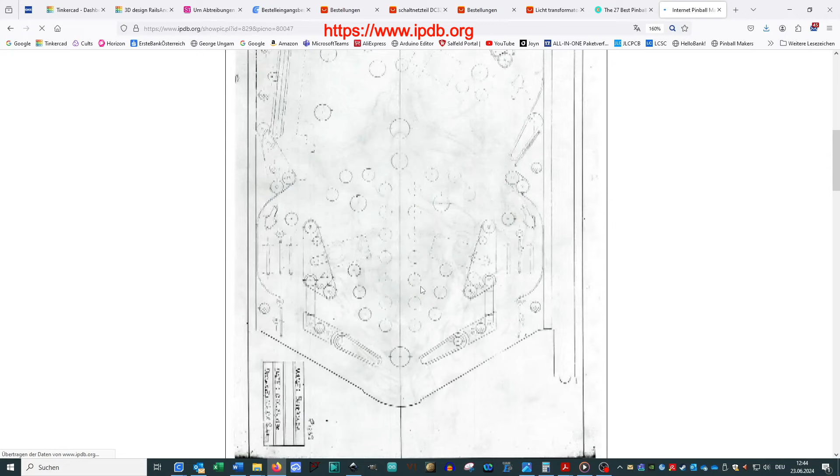I started looking for documents about the machine and I ended up on the Internet Pinball Database site. I was extremely lucky that a playfield plan for the Fathom is available there. This makes the reconstruction much easier and ensures that the proportions will be correct when scaled down to a playfield size of 50 by 100 centimeters.

For this project I took a different approach. Instead of using a blueprint to transfer the dimensions to the playfield and milling all the holes manually using templates, as shown here, I built a mostly printed CNC machine and milled the playing field automatically. As it turned out, this wasn't as beneficial as I thought.

Regardless of whether it is milled by hand or automatically, the plan must be adjusted to the correct size. The playing field will be 500 by 1000 millimeters. I use the vector graphics program named Inkscape for this. I create a frame exactly as big as the playfield will be and place it directly above the document. This helps to position the downloaded blueprint better.

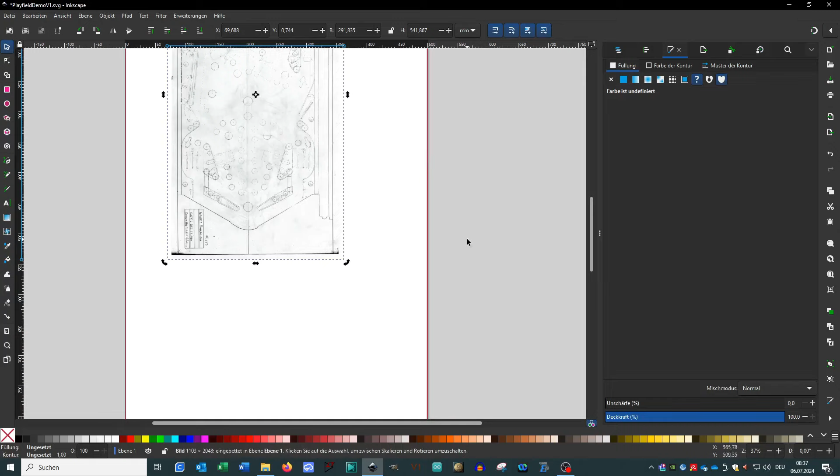Now the previously downloaded blueprint is imported and roughly adjusted to the required size. As it turned out, the blueprint was a bit distorted and also a bit twisted. The plan had to be aligned with the frame.

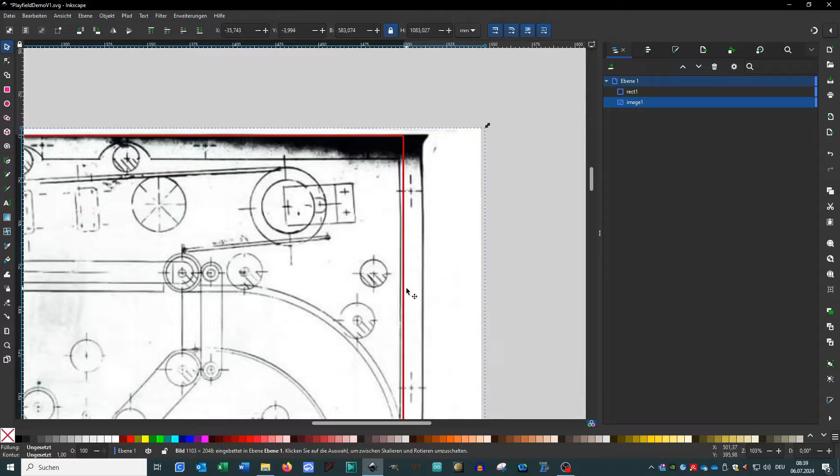In order to align the construction plan correctly, a circular area was inserted which has the dimensions of the ball. With this, the construction plan can be aligned so that the ball exit channel has the correct width. There was a lot of fine-tuning to do, a pretty fiddly job.

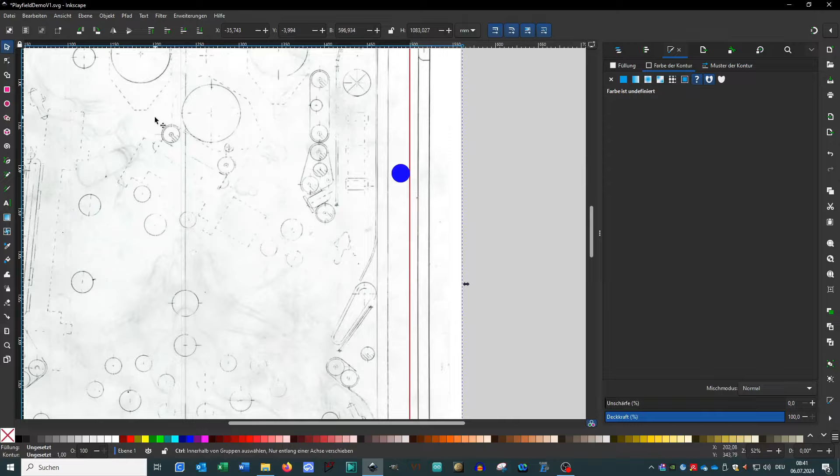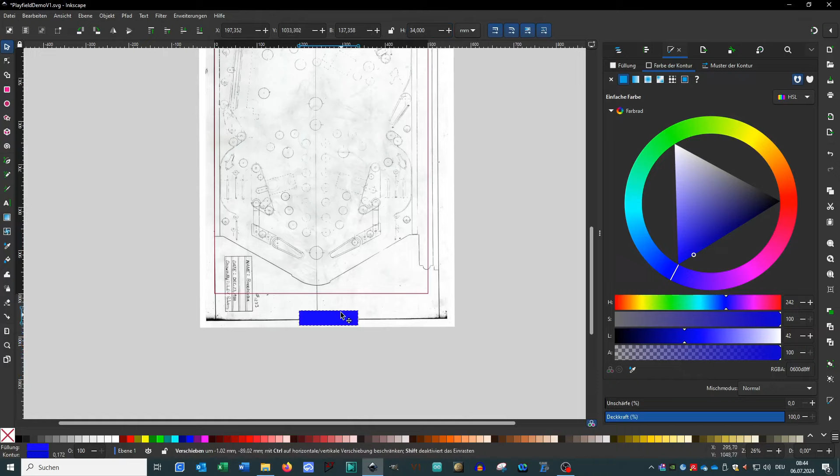Now a rectangle was inserted to adjust the bottom arch distance. I check everything again. Then I remove the circular area and the rectangle. Now I export the document as a PNG graphic. It will now have the exact dimensions required.

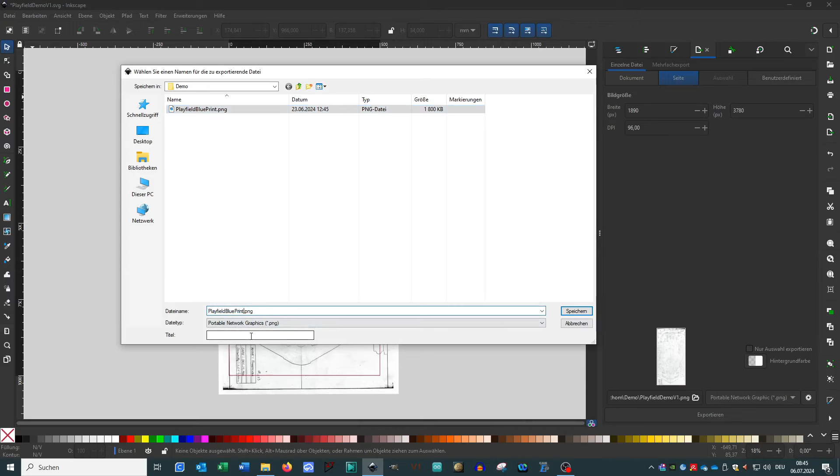I open the exported file to check it. This PNG graphic is needed in the next step. I save the work under a different name, remove the blueprint and import the PNG file I just created and position it exactly above the document.

It is necessary to define at least 3 levels: one for the top and one for the bottom of the playfield and one for the blueprint. The parts which are milled or drilled from above and below must be inserted in the corresponding level. The frame which is already inserted for the blueprint is now copied to the other 2 levels. This is necessary so that the edge of the playing field is visible in the milling program.

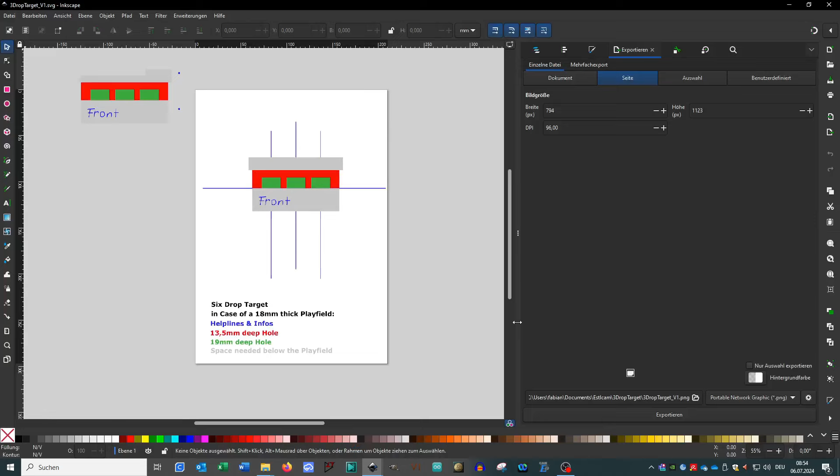I have prepared vector graphics for the individual assembly types. These graphics must now be inserted and aligned individually at the appropriate location. Of course, it must also be inserted on the correct level and, if necessary, moved to the correct one, as here. The transparency of the assembly graphic is increased so that the blueprint can be seen through it. Now the drop target assembly is precisely aligned.

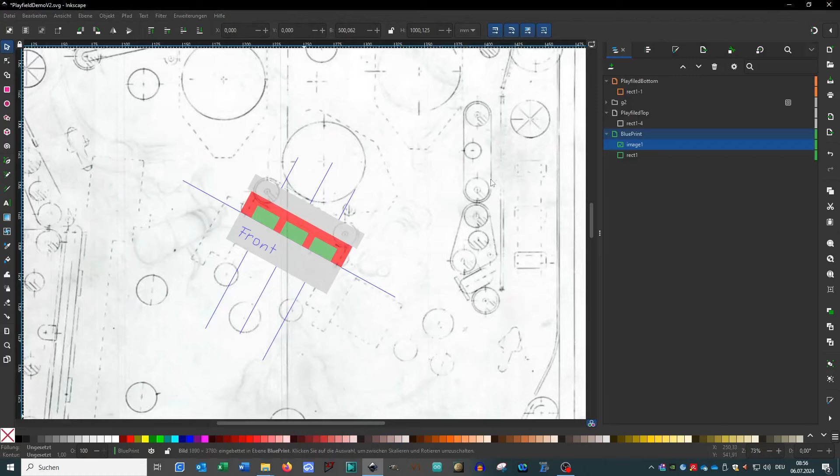This procedure must now be repeated for all assemblies. The inline drop target is inserted here. The gray area defines the space required by the assembly under the playfield, the green holes and red blind holes. The blue lines are for alignment.

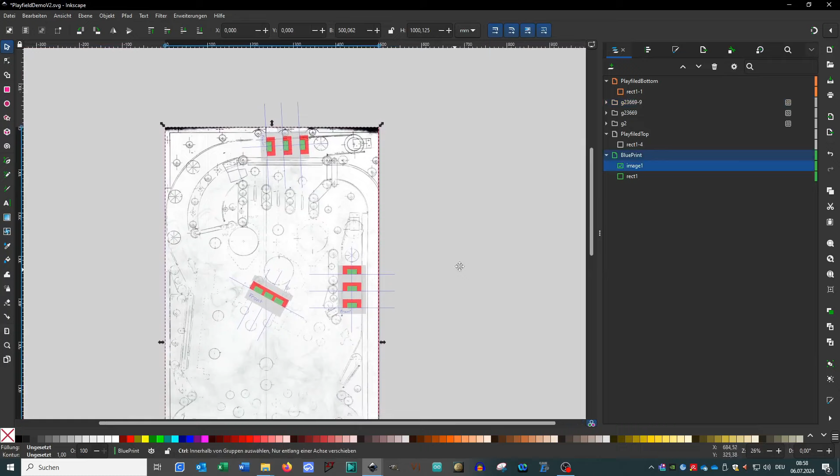Now the 6-drop target vector graphic is inserted. The procedure is the same as for the drop targets before.

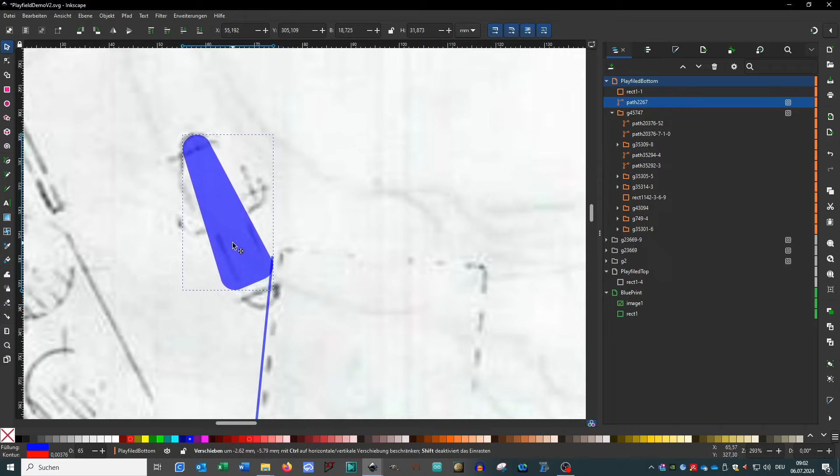I'll now continue with the arrows. I left them in the design of the Space Shuttle pinball machine because I like this design better than the Fathoms. These are copied and inserted and aligned at the appropriate places. Now the bumper vector graphics are inserted and aligned. All assemblies graphics must now be moved to the correct level.

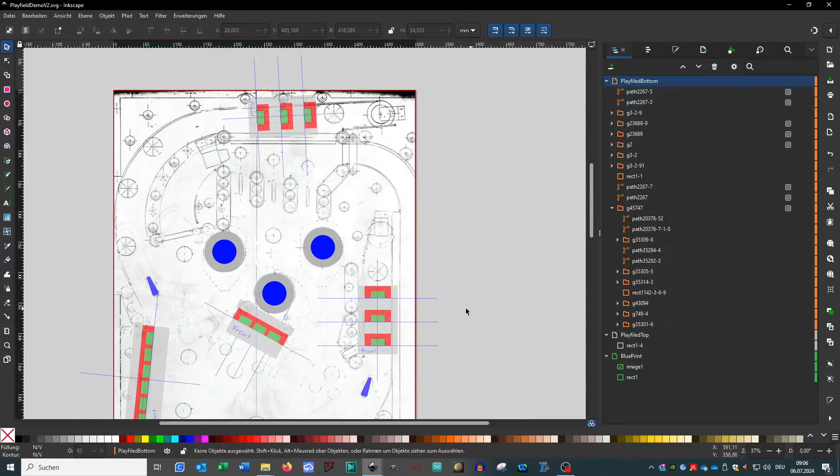Now the graphics for the flipper axis position are inserted. Unfortunately, the blueprint is distorted, so I have to determine the position intuitively. The flipper distance of 178 mm results from the scaling.

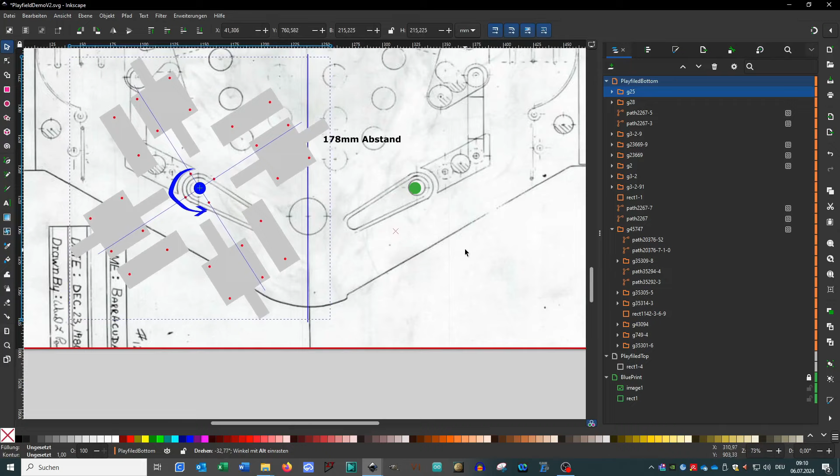The vector graphics for the flipper assembly are inserted. 2 solenoids and a leaf spring switch are required per flipper. The graphic contains all 4 possible positions for these. The blue arrows correspond to the direction of rotation of the flipper.

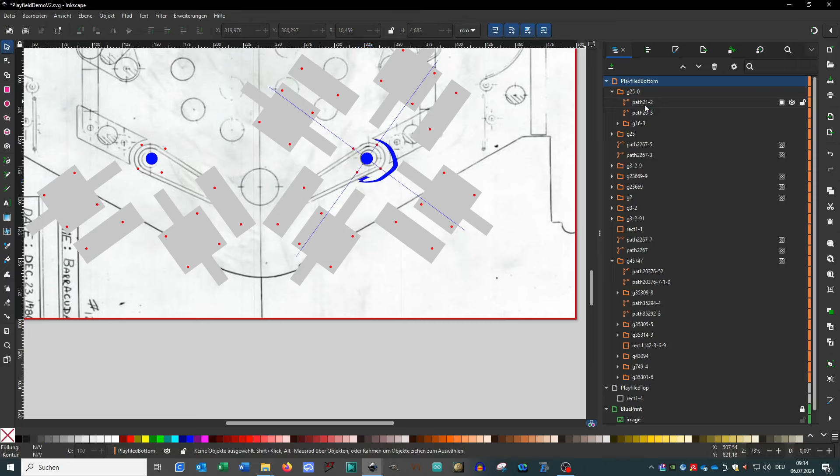The graphics must be aligned so that 2 solenoids and a leaf spring switch do not overlap with other assemblies, lamps or sensors. The parts of the graphics that are not required must be removed. The red dots correspond to the holes needed to attach the pinball assemblies to the playfield.

The third flipper is now inserted. Since there is not enough space for a 90 degrees arrangement of the solenoids, they are arranged one behind the other. As before, any graphic parts that are not required must be deleted.

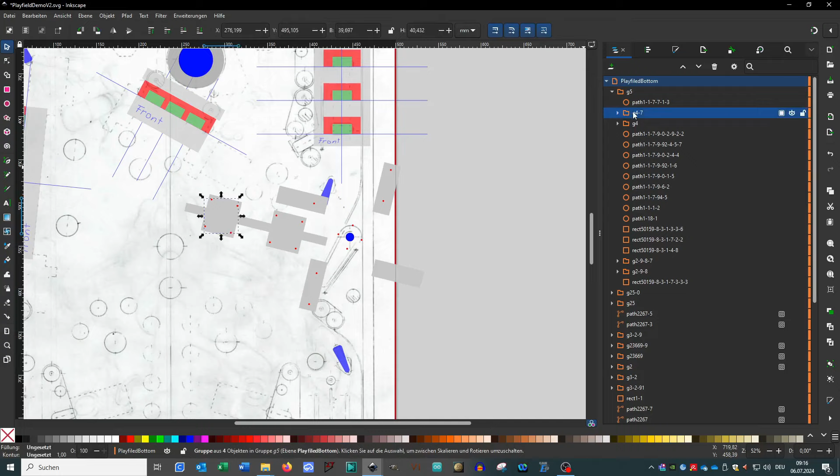I copy the kickout assembly graphic. This is inserted and aligned in the appropriate places. The red area represents the space required under the playfield, the blue the required hole. Here too I remove the unnecessary graphic components.

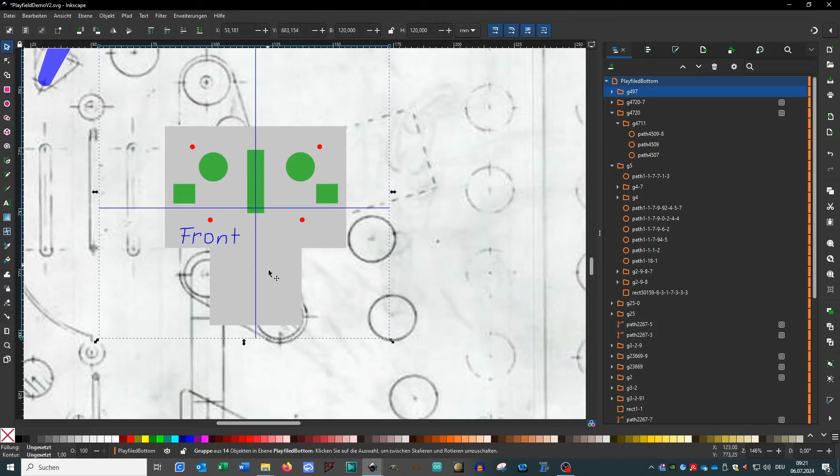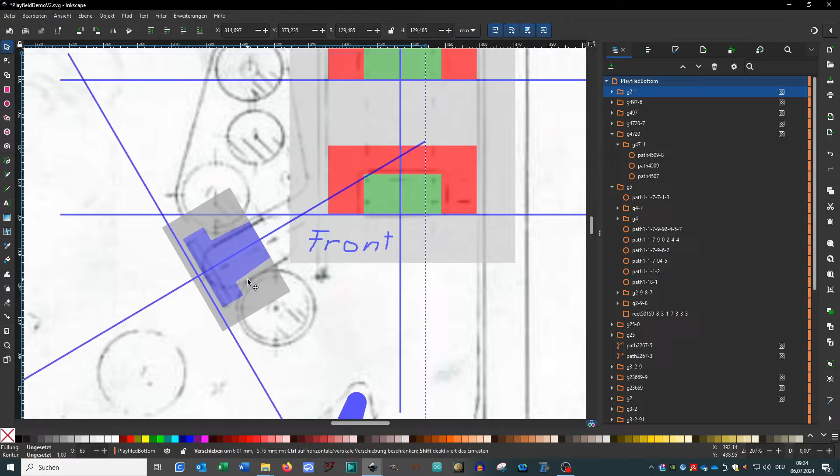As with the assemblies before, I proceed with the slingshot in the same way. And now I do the same thing with the stand-up target. Since I did not delete the unnecessary graphic parts in some assemblies at the beginning, I am now doing this.

Now the lane guides are inserted and the usual procedure is followed. The red dots correspond to the required holes.

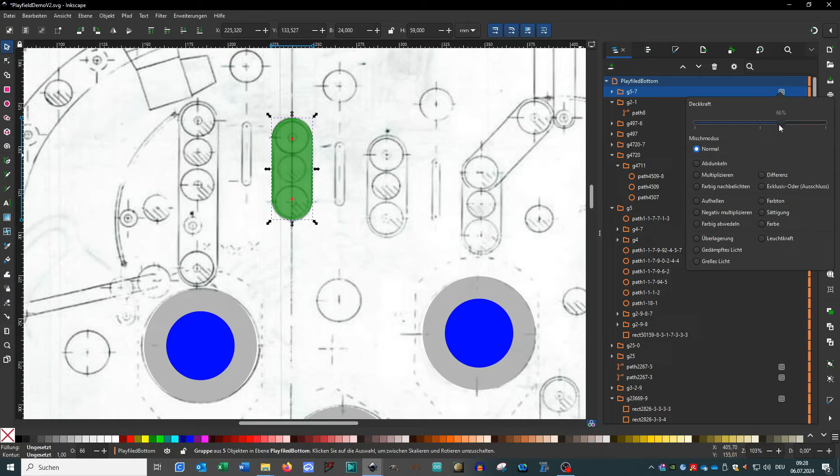Now the holes for the lamps are inserted. The blue area corresponds to the hole and the cyan area to a blind hole. The blind hole is needed because the bulb socket thickens towards the bottom. In some places the holes for the lamps have to be aligned so that they do not overlap with other holes.

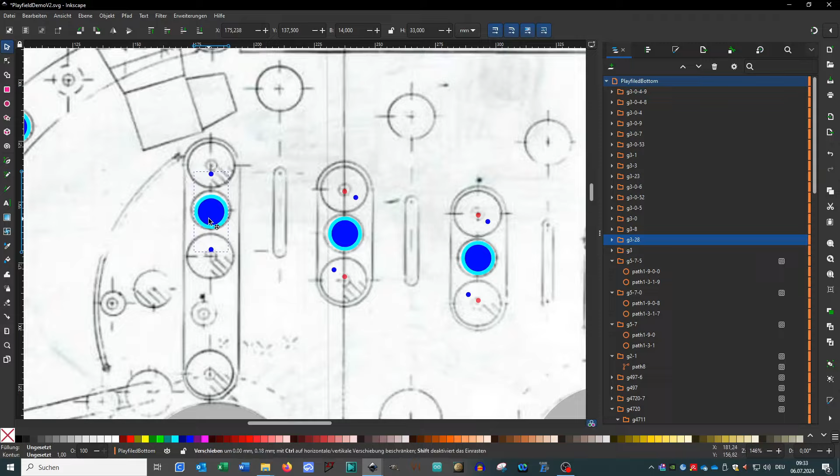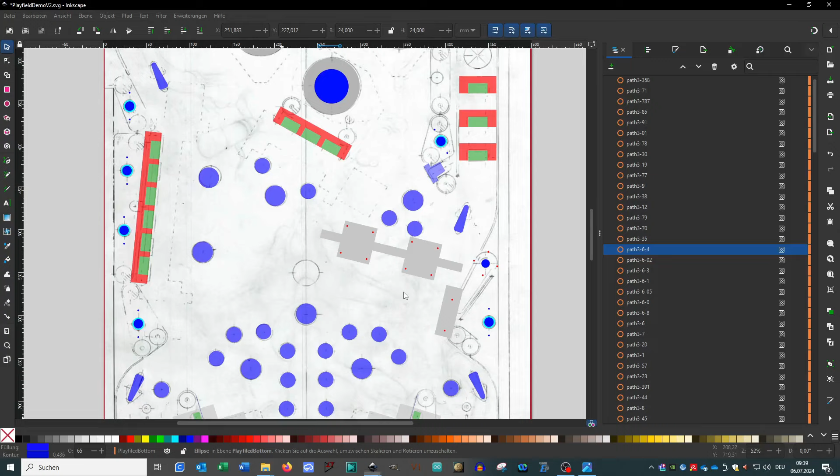I create a circular area for the lamps and sensors and copy and paste it in all the necessary places. I also change the size of the circular area accordingly. Here I notice that the blueprint differs from the real Fathom playfield. I check this using pictures that I downloaded from the internet beforehand. I insert these lamps according to the pictures.

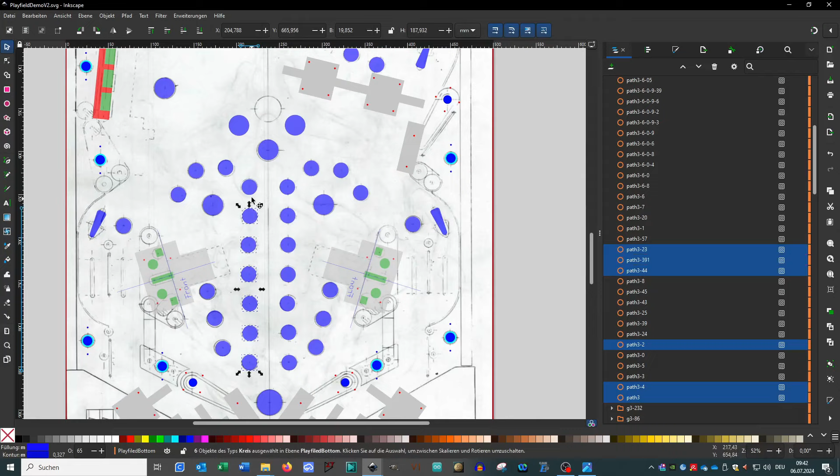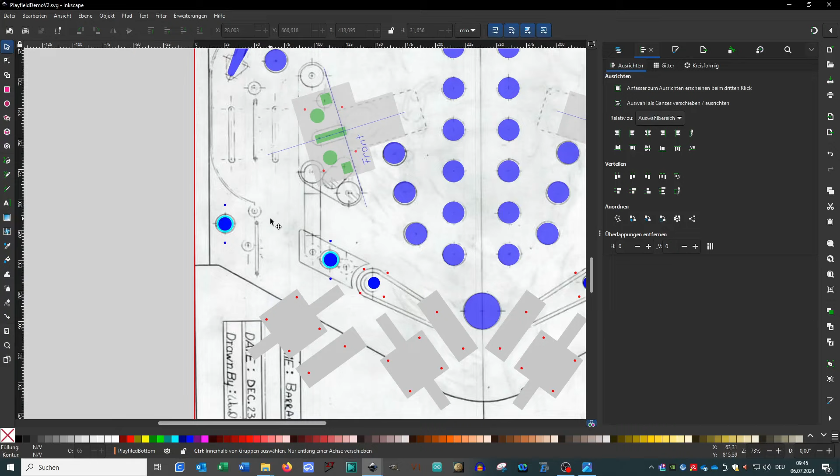After all the lamps and sensors have been inserted, I align them horizontally and vertically if necessary using a graphic program's tool. Now I continue with the playfield posts. As before, the graphics are inserted, configured to be transparent and inserted and adjusted in all necessary places.

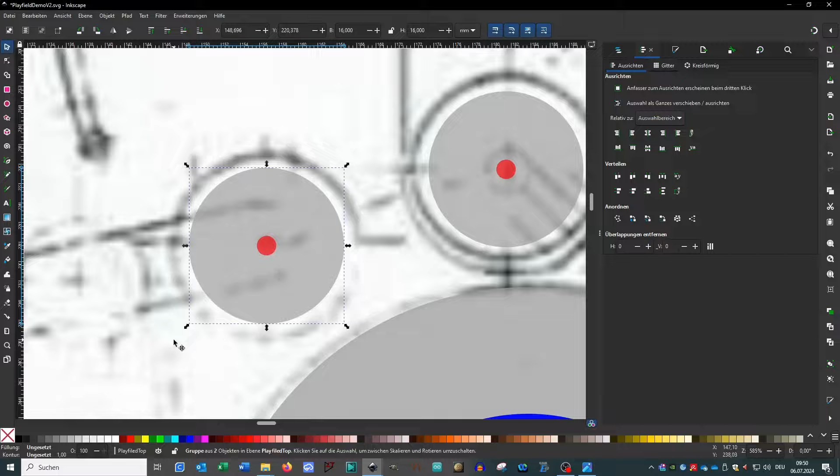I forgot 4 holes for the lane sensors before, which I am now adding. To be on the safe side, I check whether others are missing.

I'll continue with the rail posts. The red dot on the posts corresponds to the hole required. The posts must be inserted at the level that corresponds to the top of the playfield. The rail posts will later hold the rail that defines the lane path.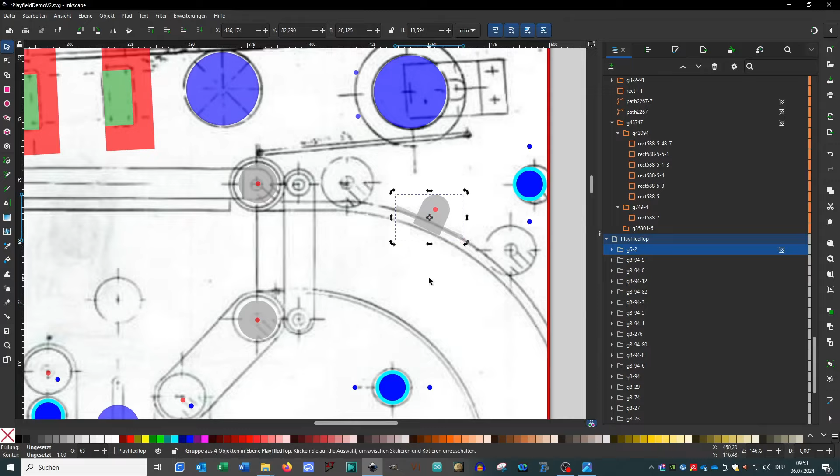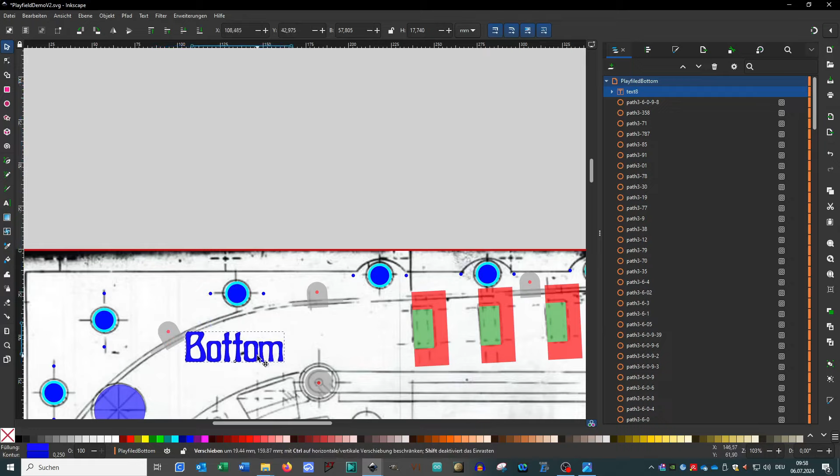The top and bottom sides are milled and drilled one after the other. Therefore, I add labels that define the level in the graphics program. The bottom of the playfield has to be mirrored, so I also mirror the label.

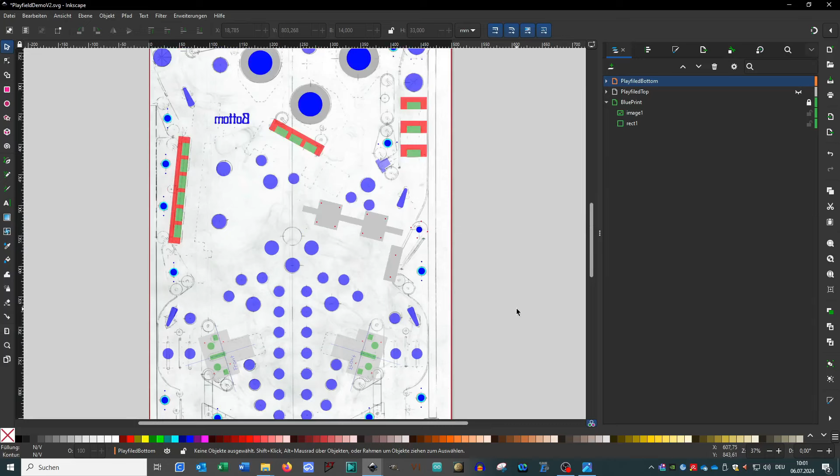Now I check whether all assemblies, drillings and holes are inserted on the correct level. This is very easy to do by fading the individual levels in and out. With the slingshots I also remove unnecessary graphic parts that are not needed for milling and drilling. To keep the video shorter, from here on only the bottom side is shown.

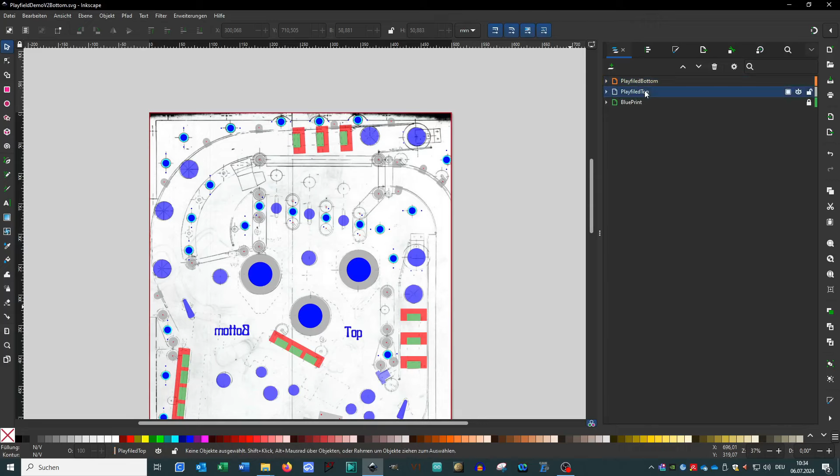Since all assemblies, holes and drill holes have been successfully created, the graphics, top and bottom, must be separated from each other in order to be able to import them individually into the CNC program. Therefore, I save them under an appropriate name. The entire graphic for the bottom side must be mirrored, rotated 90 degrees and saved as a DXF file so that it is displayed correctly in my CNC program.

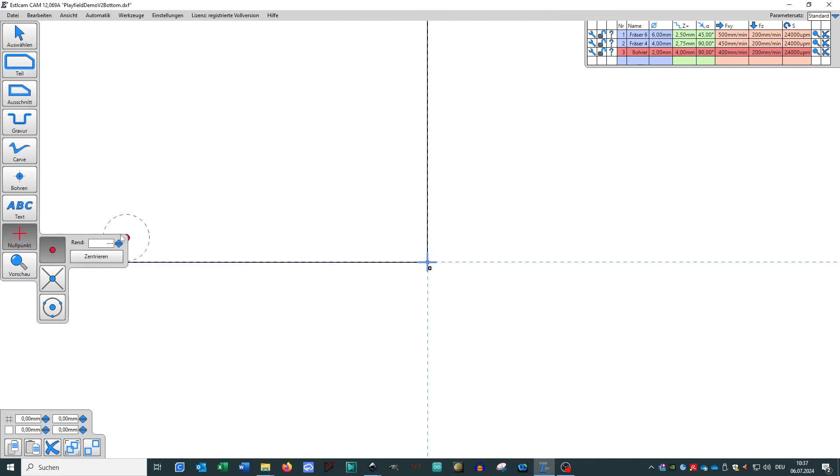I use Estlcam as a CNC machining program. I open the previously saved file with it. Here I set the 0 point. I start to configure the drill holes. I defined a 2 mm drill in the CNC program, activated it and selected drilling. Now all the holes have to be configured.

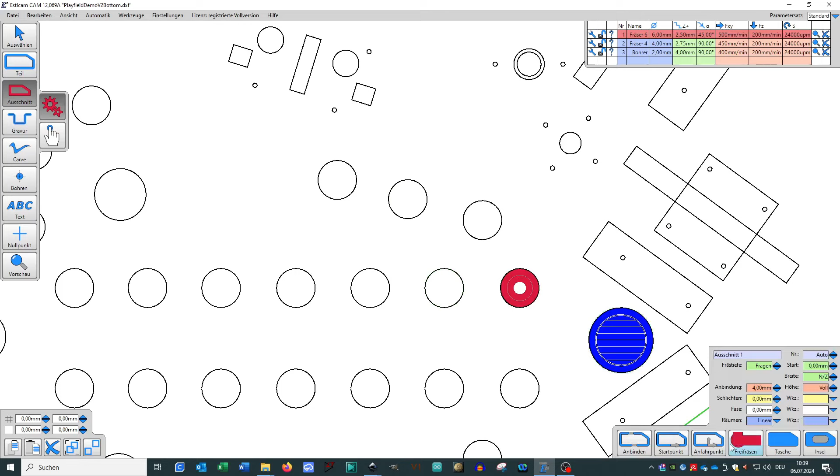After the drilling holes, I will configure the holes for the lamps, sensors, bumper and kick-out hole. To do this, I switch to a 6 mm milling head. I now select the cutout function in the CNC program and use it to mark a group of lamps. I select these and define the milling depth as 19 mm, since my playfield is 18 mm thick. I also configure the complete cutout function.

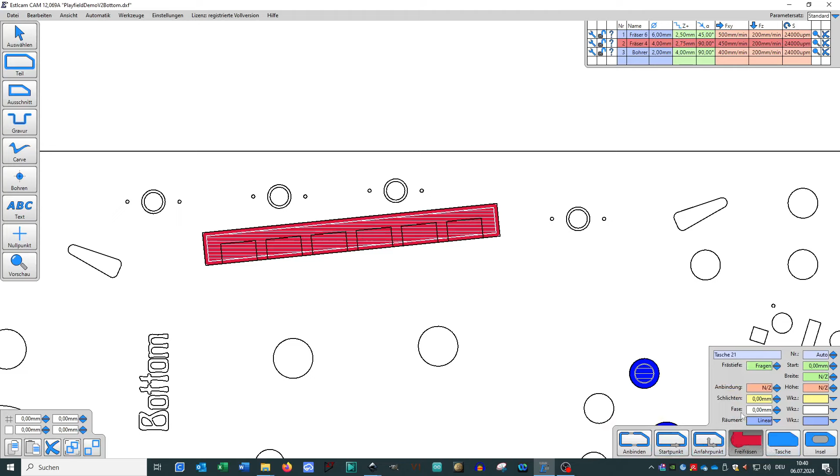Here I switched to a 4 mm milling head to configure the drop targets. I start with the blind hole, which should be 13.5 mm deep. Then I configure the holes for the individual drop targets, which should again be milled 19 mm deep.

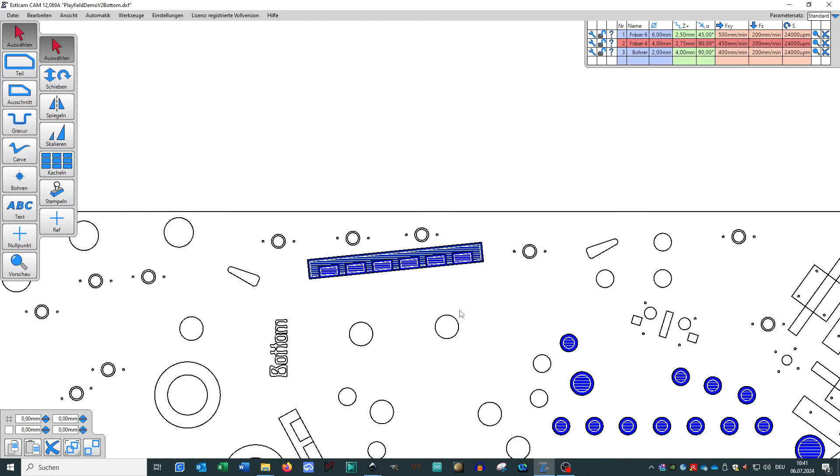Now I configure the holes for the lamp sockets. To do this, I switch back to the 6 mm milling head. First I configure the entire hole, then the blind hole with a depth of 7 mm. Here is the end result after all drilling and milling operations have been configured and some cleanups have been carried out, such as removing irrelevant rectangles.

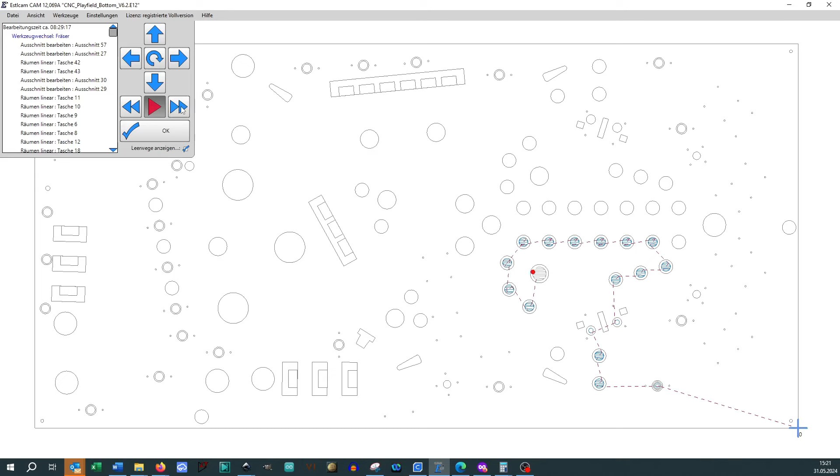I started the CNC machining simulation to check whether all milling operations were carried out correctly. Since the simulation was successful, the next step is to produce the playfield with my CNC milling machine.

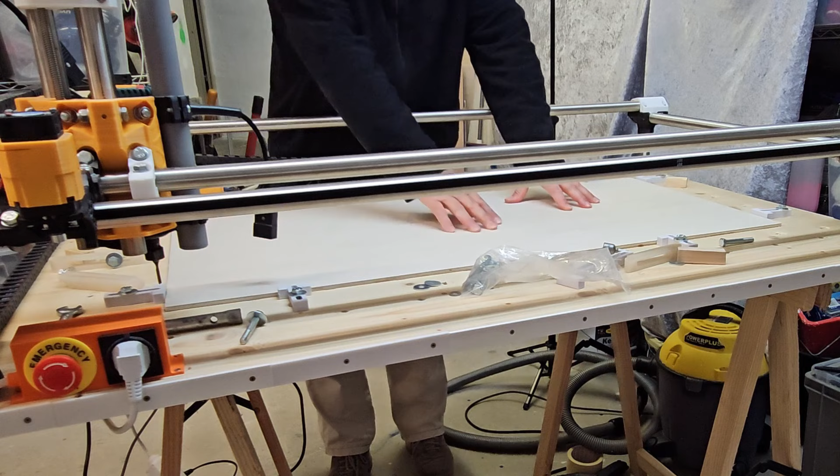First I place the sacrificial plate on the CNC machine, then I take the plywood plate that will be machined and attach it. Then comes the fiddly work of aligning the plates precisely on the machine and setting the 0 point. I fix the plywood panel in the CNC machine. Now I adjust the level of the milling head.

I do this like with a 3D printer with a thicker paper and slowly move the milling cutter down until the paper can no longer be easily pushed back and forth. I zero the X and Y axes by letting them touch the end. Since my CNC machine is very simple, this is the quickest way to do it.

Now I have to make sure that the plywood panel is 100% parallel to the X-axis. To do this, I measure the distance between the panel and the milling head at various points using a sliding gauge. Here I have to move the plywood panel slightly. I loosen the fastening of the plywood panel and tap it into position with a hammer. Then I fasten the plywood panel again.

Finally, I aligned the plywood and adjusted the CNC machine. The next step is milling. Well, it started with a big failure. Although I had already milled a lot with this CNC machine, it failed right from the start. Since the groove that was accidentally milled did not go through the plywood, I decided to continue.

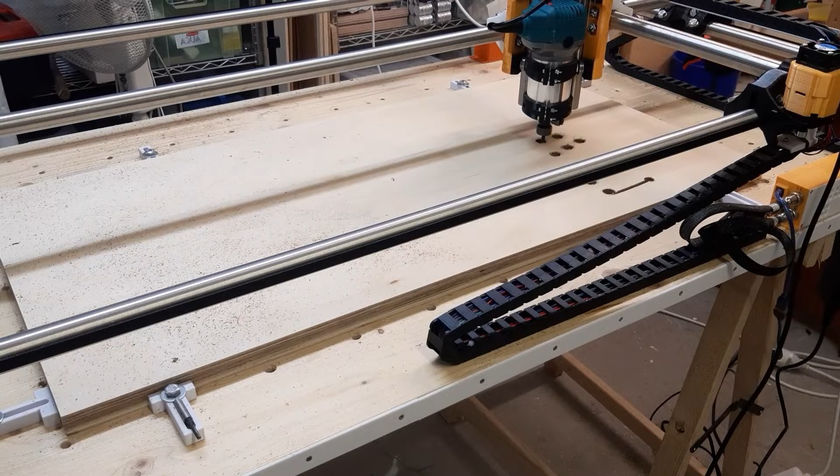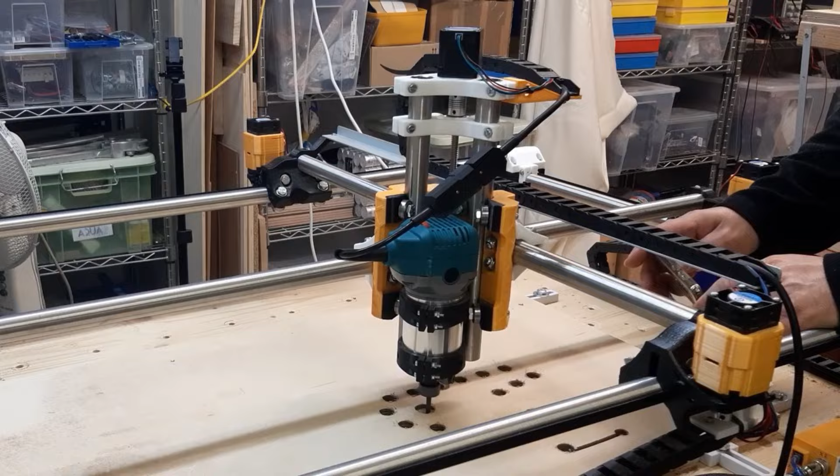Unfortunately, I didn't fix it right away, so it happened again. Nevertheless, I decided to continue with this playfield in order to test the entire milling process. Of course, after each failure I set the 0 points of the CNC machine. I also solved the problem with the milling carriage.

Milling the holes took about 2.5 hours. Because my stepper motors skipped steps, the playfield was anyway unusable. I had an offset of 1.5 mm between the first and last hole. Therefore I didn't mill the holes for the drop targets and drill holes. The result can be seen here. Manually vacuuming the dust was also very tiring. So I had to take care of the CNC milling machine first.

After I fitted the CNC machine with a dust extractor and solved the problem with the stepper motors, I started with a new sheet of plywood. At the beginning everything looked good. This time my cheap milling machine started to have a problem with its rotary wheel, it just stopped. Luckily, I was able to stop the milling program immediately and there was no damage to the playfield or CNC machine.

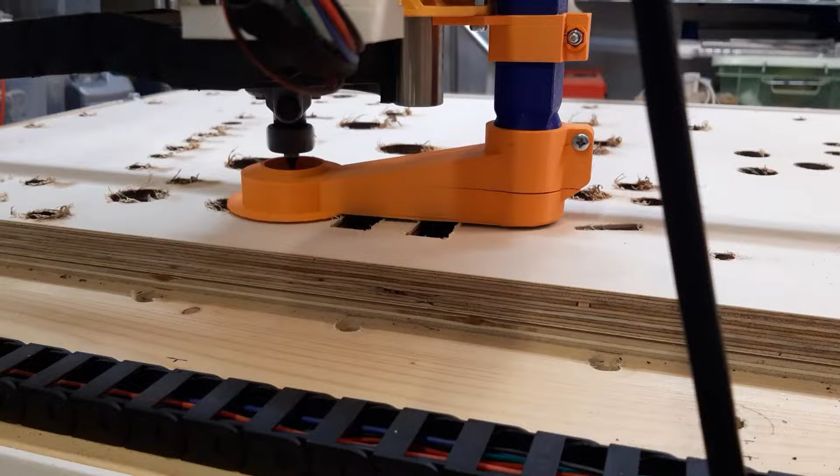The complete milling with the 6mm cutter took 2.5 hours. Unfortunately, the cheap milling machine will cause problems again. Here the last hole is milled with the 6mm cutter. Then I clamped the 4mm cutter into the milling machine and continued milling. After all the holes had been milled with the 4mm milling head, I replaced it with a 1.5mm drill and drilled the required holes.

After all the holes on the bottom of the playfield were drilled, I turned it over and drilled the holes on the top. After everything was milled and drilled, I deburred the holes with sandpaper. Milling this one playfield took almost 2 days. In addition to the long milling and drilling time of around 4 hours, there were many more hours of setting up and fine-tuning the CNC milling machine before each work step. This is the bottom of the playfield, and this is the top. Finally, I can move on to the next step.

Here I mount the playfield on my work frame. This makes it possible to rotate the playfield 360 degrees and makes working much easier. The work frame can also be set to a gradient of around 7 degrees. This makes it possible to play pinball test games during the construction phase.

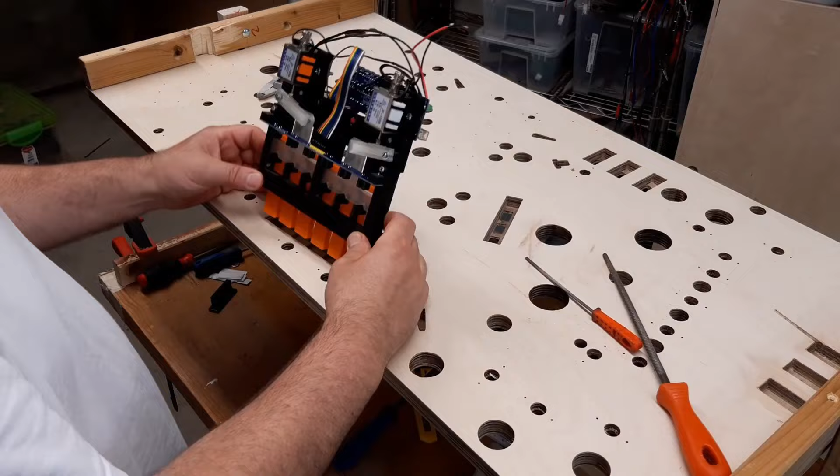My conclusion in the meantime: compared to manual milling using templates, milling with a CNC machine was more labor-intensive and prone to errors. Likewise, when milling manually, all assemblies, lamps, etc. can be immediately inserted into the milled hole. If this is too small, the template can be adjusted immediately and the hole can simply be enlarged.

The playfield also had to be milled with the CNC machine in one operation, which forced me to mill all the sensor and lamp holes. However, it is better not to mill these straight away, as this allows you to test the pinball machine and make small changes, and the sensors and lamps can still be adapted to these changes.

The holes are large enough for this drop target. The same goes for the slingshot. The holes are big enough. With this one I also have to file the holes bigger.

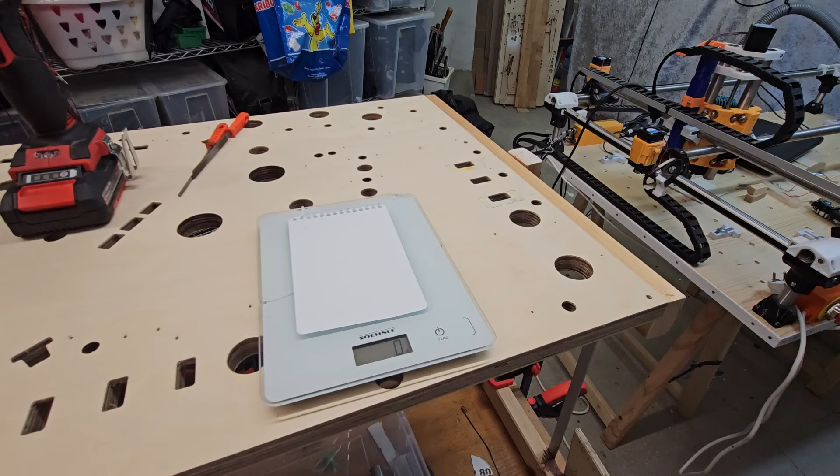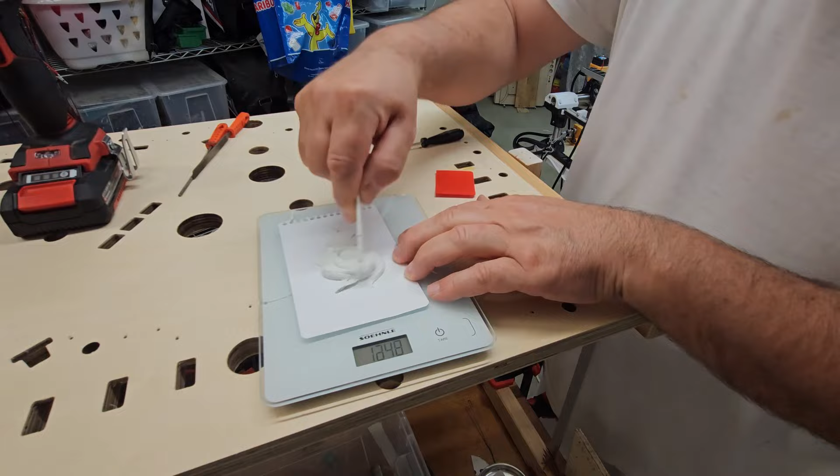My cheap milling machine had another problem that I didn't film. The collet somehow came loose and the milling cutter slipped out of it and milled these holes much too deep. I therefore had to insert inlays to close the holes and mill them again. To make the surface 100% even and smooth again, I fill them with filler.

After the filler had hardened, I sanded everything off and broke off any overhanging residue with a screwdriver. This is the finished playfield. In the next step I will install the lamps and sensors, but that will be in my next video on YouTube.